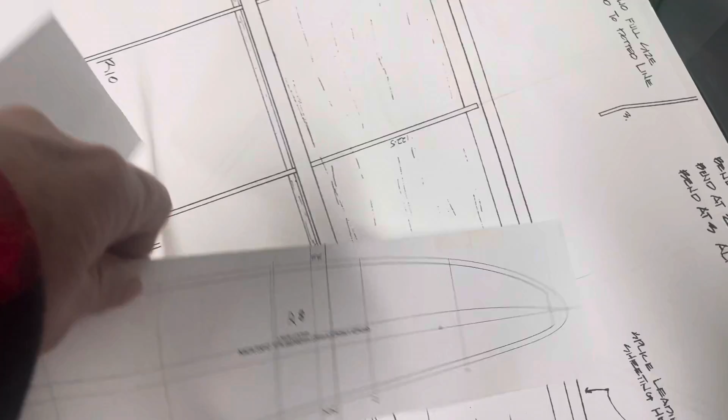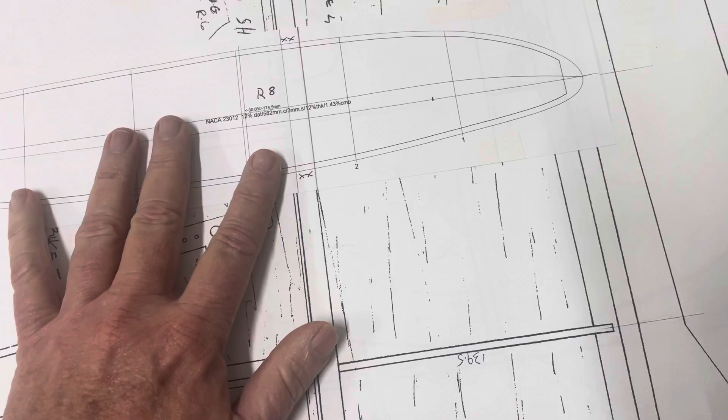Anyway, so you've got a datum line and a camber line. What I've done is I extended the datum line forward and aft. I did the same on the plan. So what rib do we have here? We have R8, which is way down there. So I've extended the center line of the rib forward and aft, and that way I can align the rib over the plan like that, and that allowed me to put a nice long straight edge like this on the plan and transfer the spar location onto the rib.

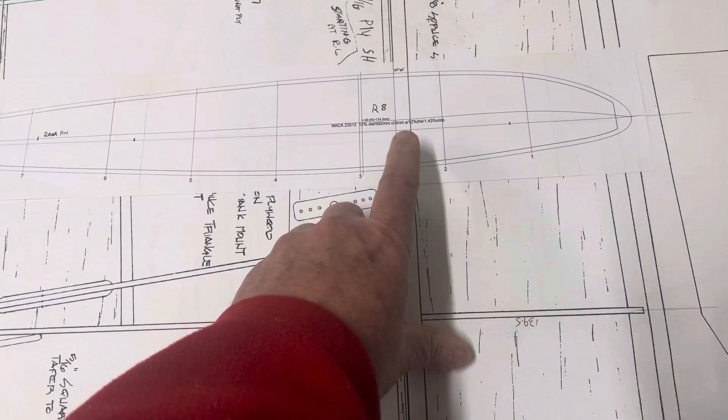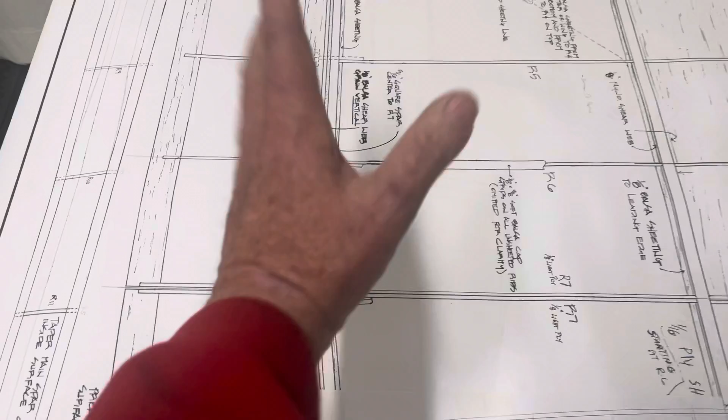Now you might be able to notice that you can see through the rib print to the plan below. So where the rear spar is at the rib location is where I marked the spot on the datum line for the rear spar. But remembering it's not the same as we did at the front, or over here, because that's a parallel chord, but this has got a taper on it.

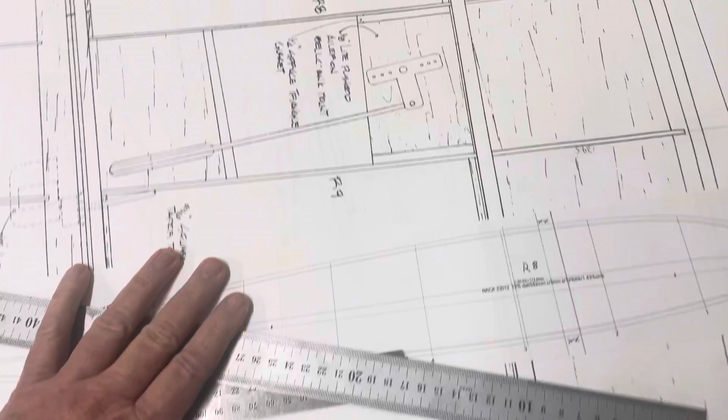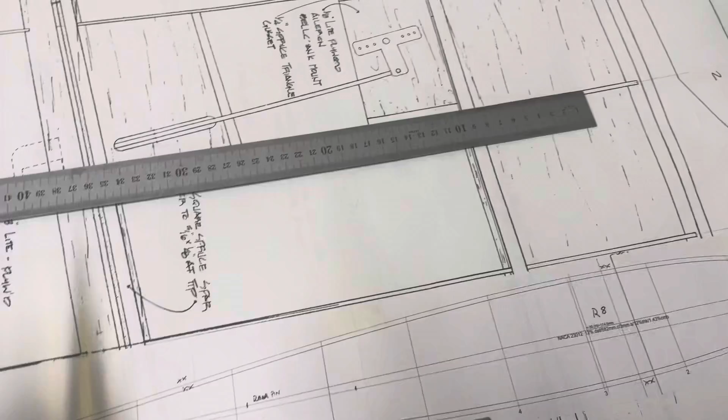So we have to draw verticals perpendicular to the datum. And to do that, I put 2 rulers. Hang on, let me bring this a bit closer. I'm not breaking my back here. So 2 rulers, set that one up there, that one in there, that one in there. So that's aligned with the datum. Then I can take that ruler away and bring in a little square and draw in the verticals for the rear spar location on the rib.

So then it's just a matter of setting the depth of each rib, each spar cap in the rib, and that is measured off the plan here. I'll go into a bit of detail what I'm doing there.

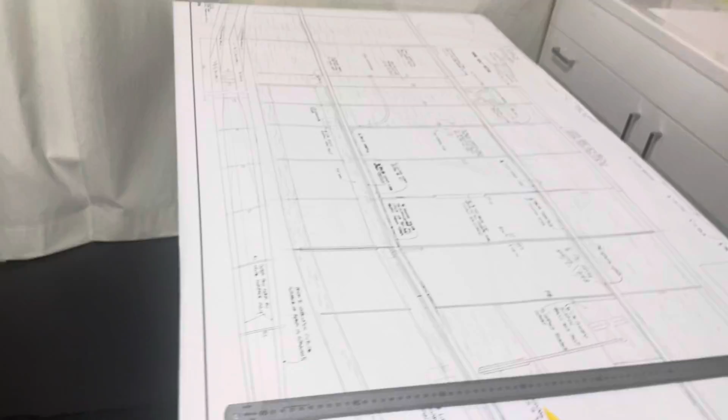This is a 130-inch wing, and Jerry decided he wanted it one piece, and I decided I'm not having it. Too big. So I am splitting the wing. I'm still keeping it bolted onto the fuselage, bolt-on paraphernalia down there, but I'm splitting the wing at the aileron flap join.

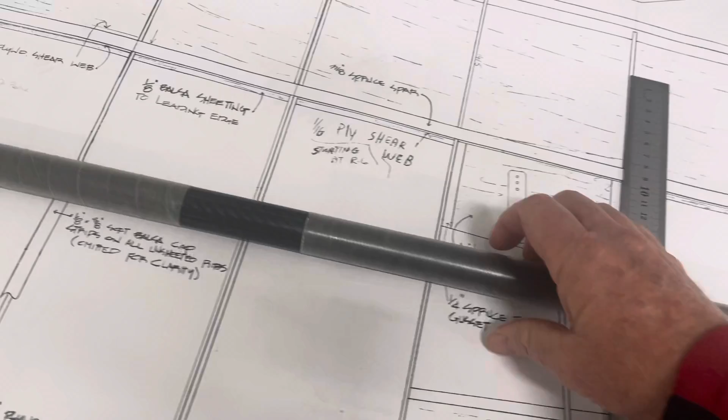So I've bought myself a 26mm carbon tube, and I made these fiberglass outers, which I can go into detail later on if anyone's interested, or you can buy telescoping stuff. But anyway, I bought the rod, or the tube, and made the carriers from fiberglass, and they will set into the ribs between the spar caps.

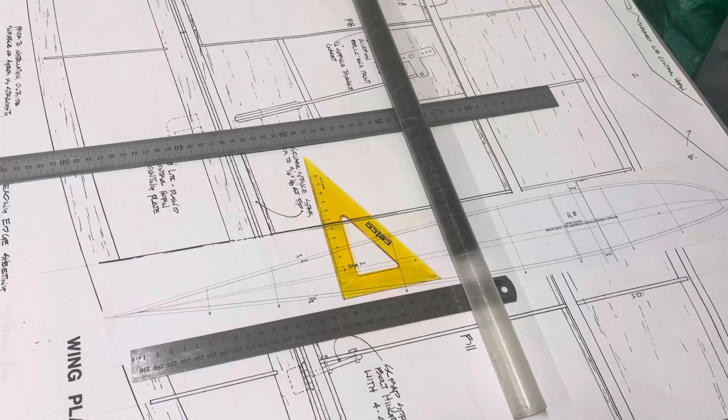What else? I think that's about it for now.

The wing jig. Yeah, okay. So originally Jerry wanted it to make up a jig to build it on. And I thought, I think I'd rather just put tabs on the bottom of a rib, which you can do with CompuFoil. You can put tabs on the printout. But then I learned only recently that the wing has got 1.5 degrees of washout from root to tip.

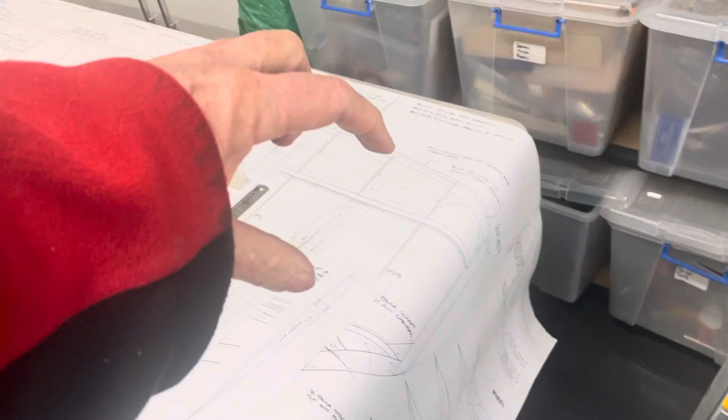There's also the elliptical plan form, and for want of a better phrase, an exponentially thinning wing depth-wise, thickness-wise. So I just thought, oh, too hard to try and figure that out with tabs. So back to the wing jig arrangement, and I think it's actually going to work out pretty well.

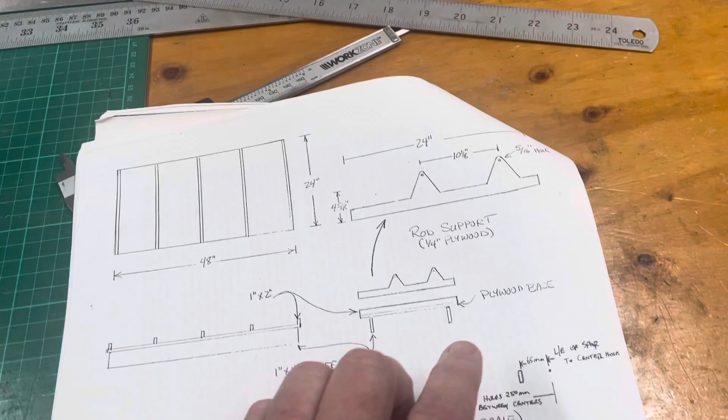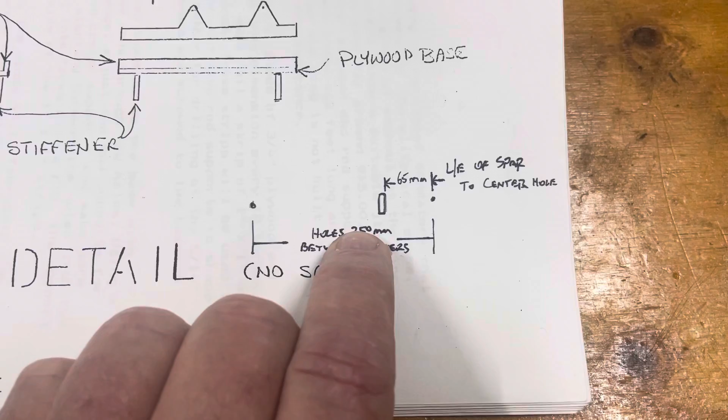Jerry's drawing says 10.5 inches. Correction, 10 1/8. Okay, so let's make it 250 millimeters, because let's face it, there's only 3 countries in the world left now that use the imperial system. Myanmar and whatever else the other one is, and the US.

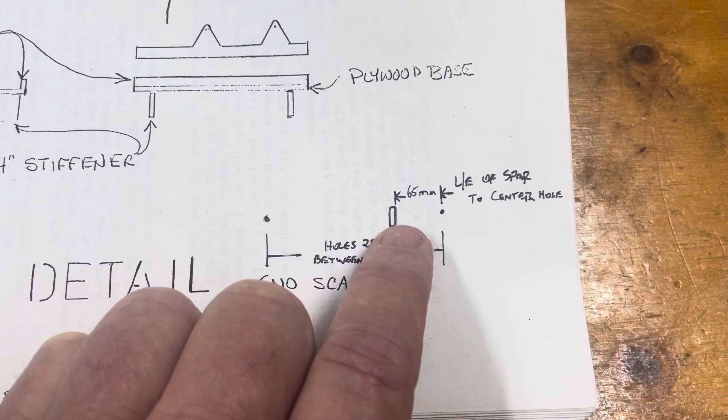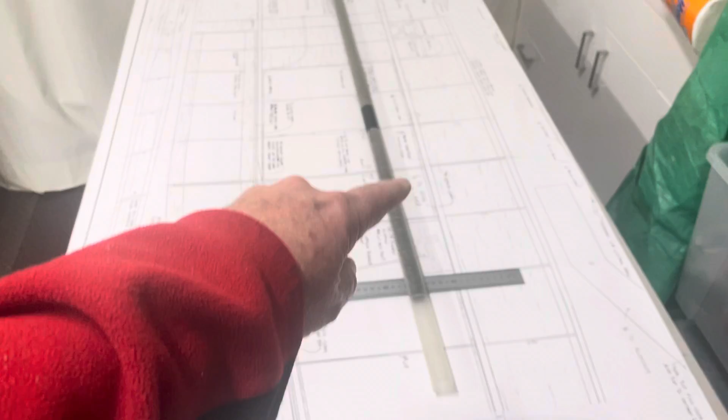So anyway, here we are. From the front of the spar forward, I've gone 65 and then 250 between centers. So that's what I've done there, and I've transferred that over to the rib drawing. So once I was able to transfer the spar location, I go 65 forward and then 250 back on all ribs, all the way out to the tip.

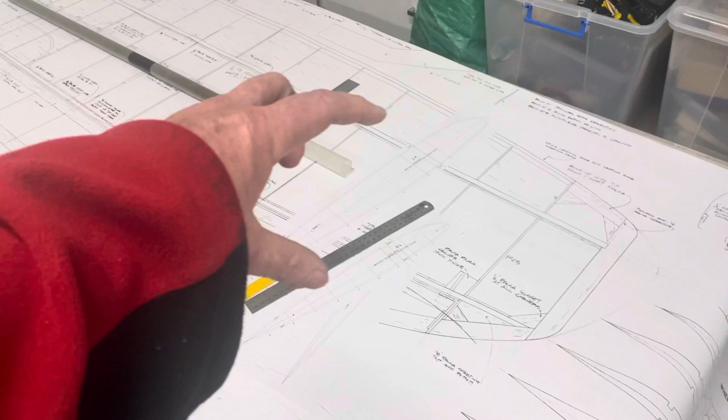There was no drawing here for a rib. You'll notice on different ME full-size aircraft, there's either the cut-off tip or the full elliptical tip. And man, if I'm going to go to this much effort to get the elliptical planform, I'm going the full hog here. I'm going to put the full tip. I don't care if the full size aircraft that I'm modelling has got it or not. I'm having it.

Yeah, none of this sort of stuff. It'll be all servos out here and servo out here.

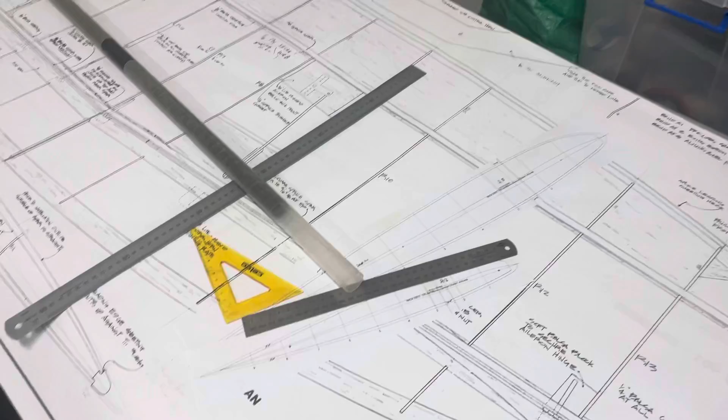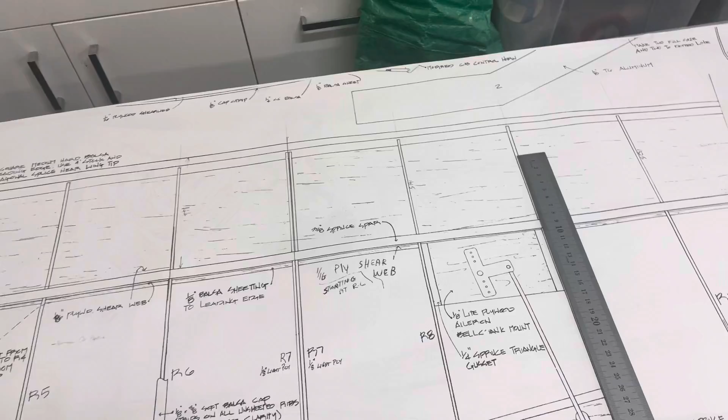Joining. I'm open to suggestions as far as retaining the 2 wing panels, keeping the wing panels together. I don't want to have to get underneath the plane. I'd rather have something I can access either from top, whether that means lowering a flap down to get access to a pin that goes from the back or something. I don't know, I'll ponder that some more.

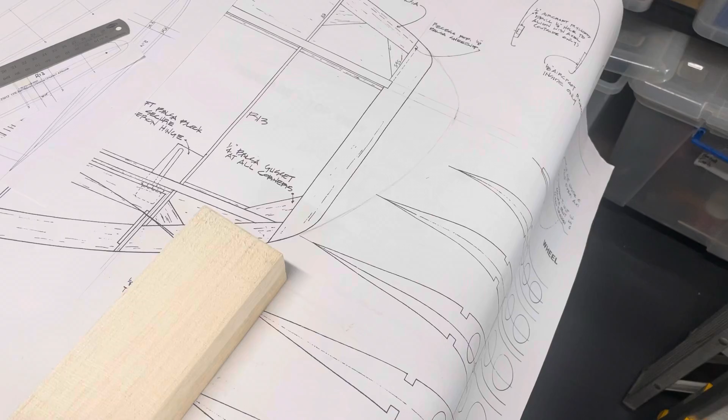Anyway, that's got to be enough for now. A couple of tip blocks here. That was pretty cool, got a heads up from a mate that there was a bit of a clearance going on at a hardware store. So this was a single block that I just split down the middle on the bandsaw. That was $6, so that's done my wingtips.

Nice. All right, that'll do it for now. Lots to do.